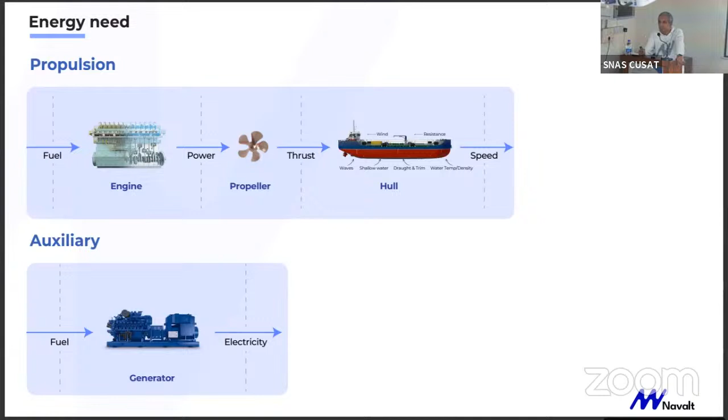Now, in any vessel, broadly, there are 5 energy sources. Of these 5 sources, the first 4 I will talk about as renewable ones. It could be a battery—the energy stored in the battery is grid energy, like KSEB energy, the electricity stored in a battery.

Solar is obviously the energy from the sun, and wind again, it could be wind to propulsion or wind to thrust, or wind could be wind to electricity as well—both can happen. Fuel cell is a broad term I have used; anything, any fuel that is used to convert to electricity is a fuel cell—it could be hydrogen, it could be anything else. And the traditional engine, where the fuel is burned. So these are the only 5 possibilities in a vessel.

So keeping that in mind—this is the whole landscape of decarbonization. When you say decarbonization or new technologies, you can think of efficiency in terms of output and input. Any vessel has a purpose—a function of a vessel is either to move people or cargo, or perform a function. That's a broad definition.

You can improve by increasing the output, like reducing port stays and so on—those are all operational improvements. You can also do a lot in terms of improving your design, like energy saving devices and various other things. That's the second broad group.

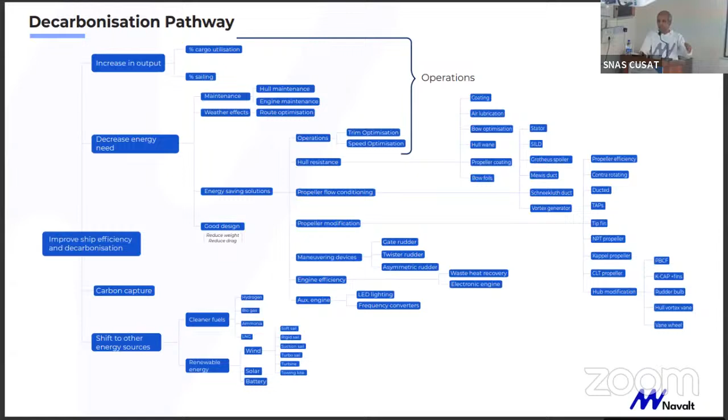And the other extreme, which is a large ship, it is also very clear that battery will not work. Solar can only contribute very little, which means wind has a play, maybe about 20%, and the rest has to be some clean fuel like hydrogen or something else. So these two are more or less clear.

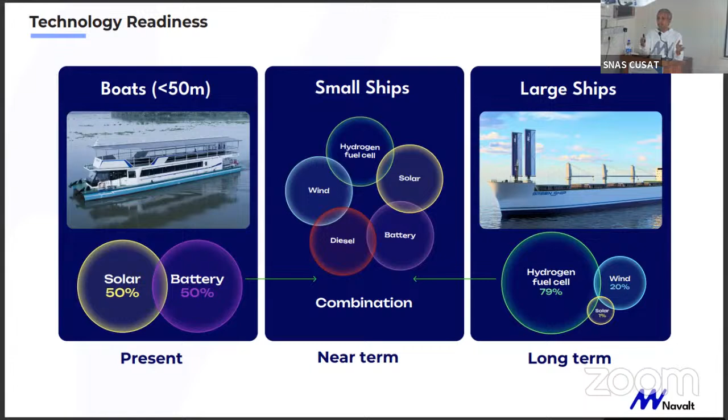And the in-between ones, which are coastal vessels, 50 to 100 meter vessels, inland vessels - here you need a combination of these, again defined by what is your energy need in a day and energy need between recharging. So that's the driver for combination.

Now, when you talk economics, first thing you have to understand is what is the cost of energy. Each energy source has a cost. So when I say cost, it's not merely the cost of the fuel, but what is the cost of energy you get. For example, on the top left is when you say battery as a source of energy.

So you have a grid cost as the input cost, you have a battery efficiency, then there is a system efficiency. So you can find what is the cost of electrical energy from a battery by using these terms. For example, if it's 7 rupees electricity cost, taking the 90% efficiency of battery and system efficiency of 90%, you get approximately 9 rupees as the cost of electrical energy from battery going into the motor. So that's the cost of energy - you get a feel of that number.

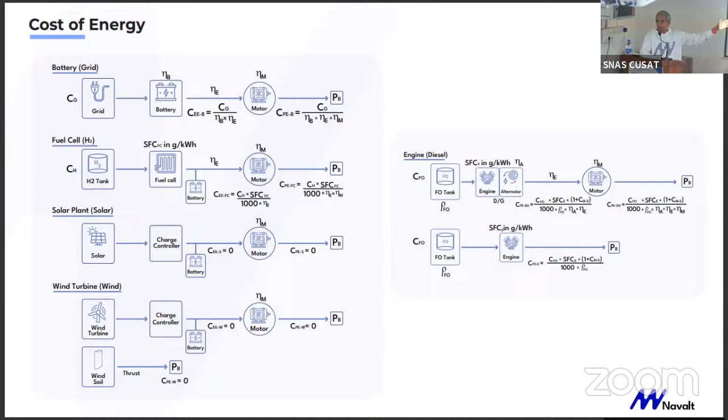Similarly, fuel cell has a cost based on fuel cell specific fuel consumption. Solar and wind, obviously, you assume the cost of energy is zero. And then the traditional diesel engine - you're already familiar with the specific fuel consumption, which ranges, for large engines, about 175 grams per kilowatt hour, to a small diesel engine in a boat, which could be 225 to 250 grams per kilowatt hour. That's the SFC conversion. With that, you can get the numbers - what is the cost of energy. This is usually the starting point when you're looking at economics.

This part is to cover which country electrification will work in, and why there is a difference in different countries. Just to give you a feel of that, I have put down the cost of grid electricity on the left side, and on the right part of the column, CFO, which is the cost of diesel. This is just to give a feel of the spread. These are ranked by the spread - the top spread is Hong Kong, where the cost of fuel is very high, electricity is very low, and so on and so forth.

So there are all these countries. India is somewhere in the top half. These are all in US cents, but just to give a feel - 125 US cents means 100 rupees, and 9 cents means about 7 rupees. So that's the number.

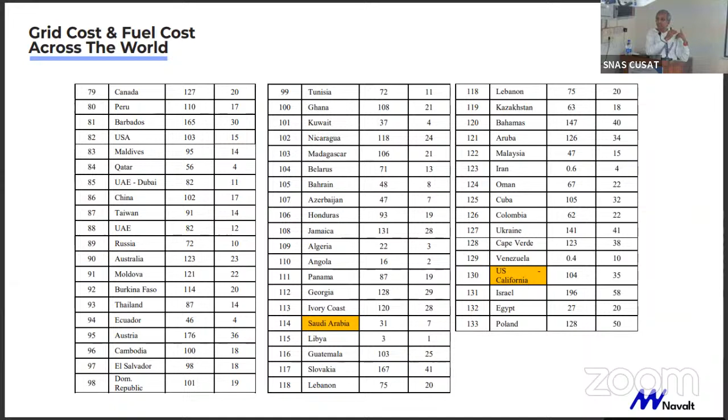And in the lower half are Saudi, California, etc., where the spread is low, and I will tell you what that significance is. So if you take those representative countries - Norway at the top, India in the top mid, and like these - the cost of fuel and cost of grid, if you analyze the cost of mechanical energy from that fuel diesel engine, which is what I represent as CEE - when I use the word, it is cost of electrical energy, and CP is cost of propulsion energy. This presentation will be shared, so you can always use that, but I'm just giving a sense of that number.

So, for example, in India, with 125 - this is 100 rupee diesel - the cost of electricity from a diesel engine, compared from battery for example, is 11, and engine is 50, which means roughly about 45 rupees is what electricity you get from a small diesel engine. This one is less. Okay, thank you.

So in India, about 50 cents or 45 rupees is the cost of electricity from using the grid versus a diesel engine, and this is from a grid, 10 rupees. This is a spread, India spread. So if you compute like this, what you feel...

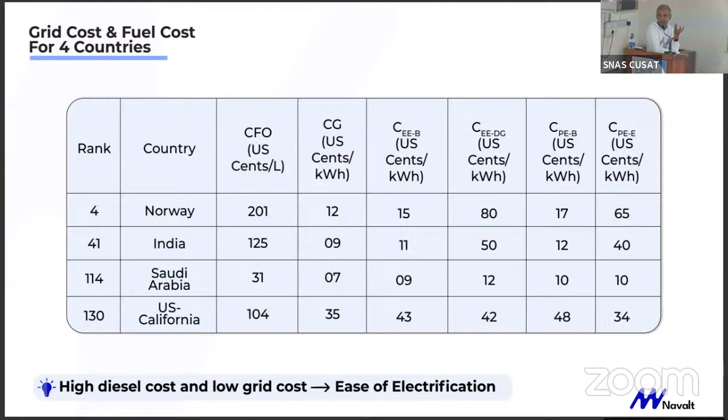Second insight you can get is when you take the numbers, for example, 80 cents electrical from DG and 15 electrical from battery. The spread is 65, 80 minus 15. So that spread is what is plotted here.

Norway has 65 auxiliary, 48 as propulsion. India is 39, 28. What this number shows you is almost always auxiliary has a bigger spread than propulsion. So when you do electrification, the first thing you should convert is the auxiliary load in a boat. Do auxiliary first, then go to propulsion, because auxiliary is always higher cost and thereby economics will work better.

Which is what we just discussed on a houseboat. So do auxiliary first, do propulsion. If possible, do both.

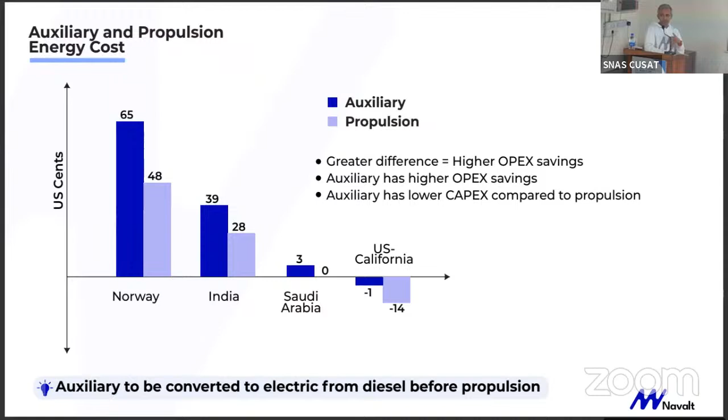Now, hydrogen is another important element to all this discussion. Today we have a hydrogen vessel in Varanasi, which Cochin Shipyard has built. Today, what is not known is what is the price of hydrogen. It's not very clear, there is no market as yet.

In Germany, there is this Toyota Mirai car. You can pump hydrogen at a station. It's about 10 euro per kilogram. It is expensive. But I have put the number 5, 3, 2, assuming that today 5 is possible.

3 may be in the near term, meaning a couple of years. 2 in the really long term. Why I say 2 is, although IOC, Reliance all have said they will do $1, theoretically it's very tough.

Because 1 kilogram of hydrogen to electrolyze, you need about 45 kilowatt hour of electrical energy. The cheapest electricity, if you get from solar, which is about 2 rupees, it means it's still 80, 85 or 90 rupees per kilogram just for the conversion. So that's $1.

Then you need another 85 rupees to compress and transfer. So $2 is the best you can achieve in 5-10 years.

So with this, when you put the same numbers, the same logic applies: auxiliary first and then propulsion. But the important thing is also, in the scenario when the fuel price goes down to 2, most countries can go hydrogen. In that scenario it goes to 2, not today.

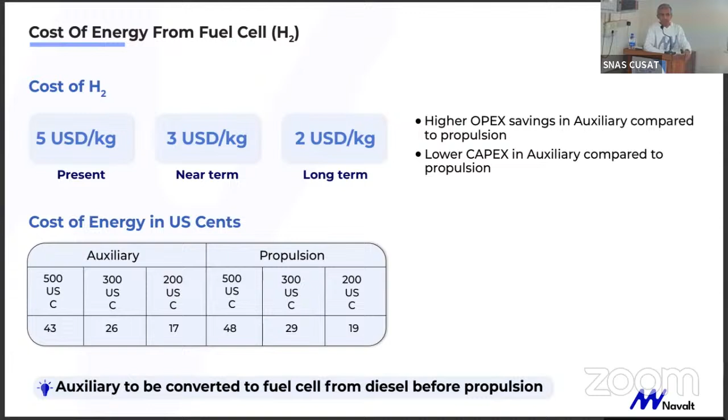Now OPEX is also so high because there's no fuel available now. It's not operating because the fuel is the tricky part. But the future is hydrogen, I'm just saying what it is today.

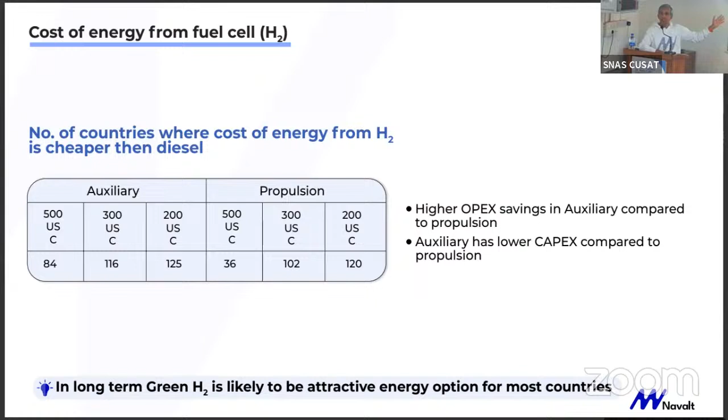So this is the number of countries where the hydrogen shift will happen. When it's low, most countries will shift. That is the expectation, and this is from an OPEX angle.

Now, in reality, there are many energy sources in a vessel. It's not just one, so you have a combination. You have a battery, you have a fuel cell, you have maybe a hybrid diesel engine, etc. So all those combinations are there. So how do you do it in that scenario?

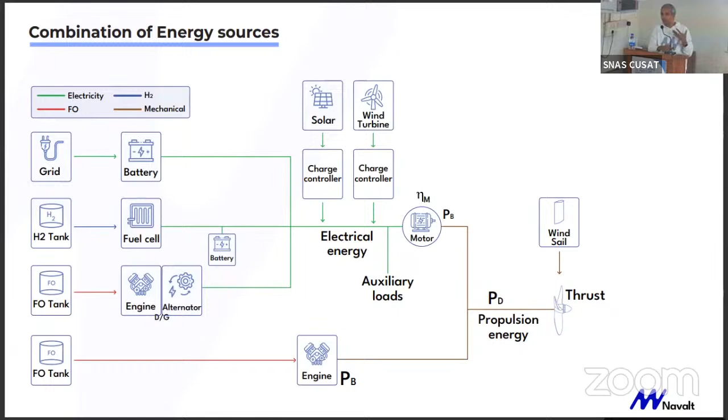Without going into too much analysis, the whole idea is you are going to know the cost of each of these energy sources and the proportion, the percentage contribution. It's like weighted average of anything, right? So if this is 8 rupees, this is 0, and this is say 20 rupees, you do percentages and you get the cost of energy. That's the logic.

It's a simple weighted average to find the cost of energy on the auxiliary side and then the propulsion side. Propulsion means some electricity generated goes to a motor to get propulsion, or a diesel engine directly. These are the only two ways, right? So this is the landscape again for how you will do the conversion and the costing.

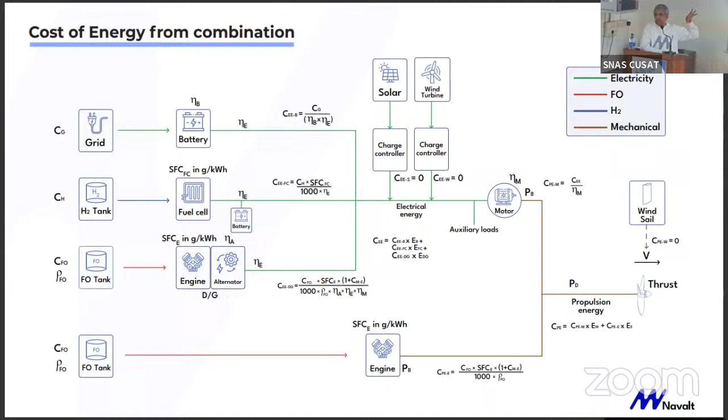Now, in the combination, I just want to give an example to give a feel of the numbers. Sir mentioned Aditya as an example, as a ferry. This is why I always argue for solar, especially in slow speed, and I'm very careful and conscious in using the word slow speed when the speeds are 6 knots, 8 knots. This is what I mean by slow speed.

Typical ferries, the contribution from sun can be high with the same structure, because once the boat is fixed, the area is fixed, your solar energy is fixed. So if your boat is going slow speed, like most inland ferries, like Aditya or any of the ferries operating, Aditya has 67% from sun. This is full year data, including monsoon, everything.

So in that scenario, what happens is, when you do the cost with 7 rupee electricity, you get about 9 odd rupees on grid cost, and the solar is 67%, meaning solar is free. So actually the cost of electricity is about 3 rupees for the energy, in the case of Aditya.

Whereas if you don't have solar and the same boat is pure electric, this would have been closer to 10 rupees, like 10, 12 cents. And if it's pure diesel, same Aditya, you put a diesel engine, it would have been 40 cents. This is the cost of energy on the propulsion side.

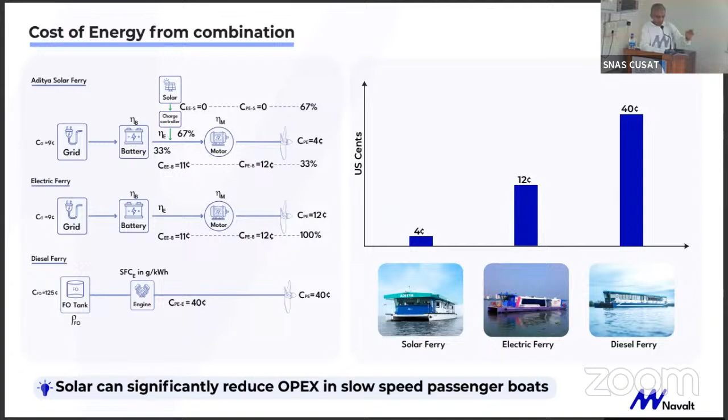Now, you can also have hybrid. When I say hybrid, it's like parallel or series. Series means the motor is the only thing that connects to the propeller. Parallel means the engine also connects. That's the only difference.

When we talk, I always give the advice that parallel is always cheaper than series, both CAPEX and OPEX. The reason in OPEX is because in series hybrid there is a double conversion, which is why series hybrid is more expensive from an OPEX angle. And series is always more expensive from CAPEX because the motors are big, so the prices go up.

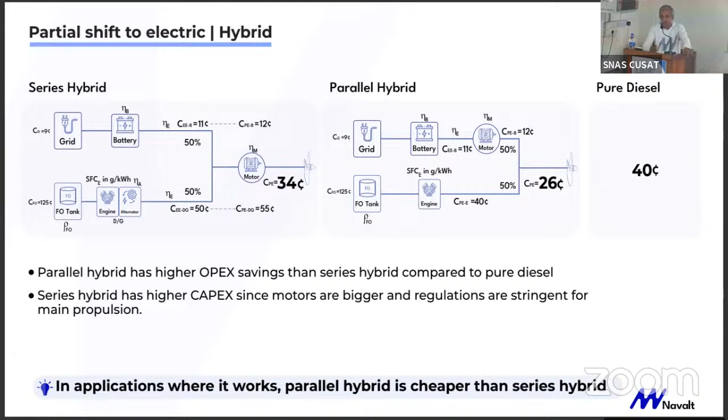So if you want hybrid and it works, parallel is the best. That's the only insight you can get from this when you do a partial shift.

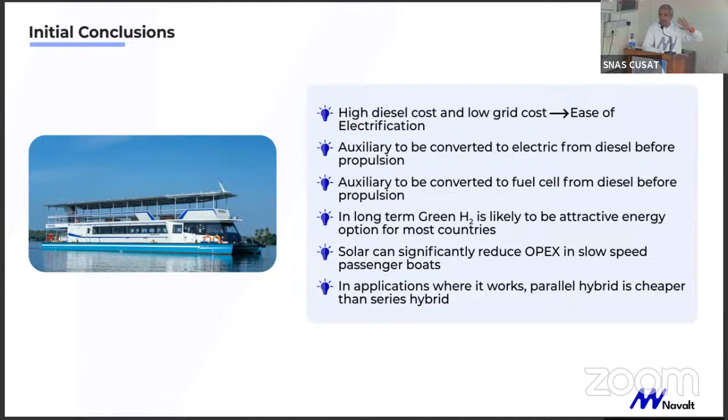So whatever I just told, I summarized as an initial conclusion using purely OPEX. All what I told, I'm not going to read again, but this is the insight you get, those 5 or 6 points you get. Now, obviously, when you say economics, it's not just OPEX that is important. You need to know CAPEX and the life cycle cost.

So this is how you should do economic analysis. Some of these numbers are based on the boats in operation. We have about 31 boats now in operation, solar boats, different sizes, small to big, and different applications like tourism. So using this data is what allows me to make this statement, which is why I wanted to set that context.

So we will take the case of a 100-passenger ferry, try the various speed combinations, 8 to 12, and range. Range, I mean how many kilometers you will run in a day. Aditya runs 66 kilometers. Most of the Kochi Metro boats run 60 to 70 kilometers. 100 is maximum. So 200 is applicable when the speeds are high, when you're at 10, 12 knots, that is when you do 200.

So if you put these same numbers, this is a foundation for the costing. And how you do costing is, again you're not going to read through this, but the logic is that you factor in all the costs, capital cost. So there will be all the input costs. These are all inputs to this analysis, which you'll be able to read when you get access to the PPT. But the idea is you get all the input cost, both CAPEX and OPEX. You have all the cost.

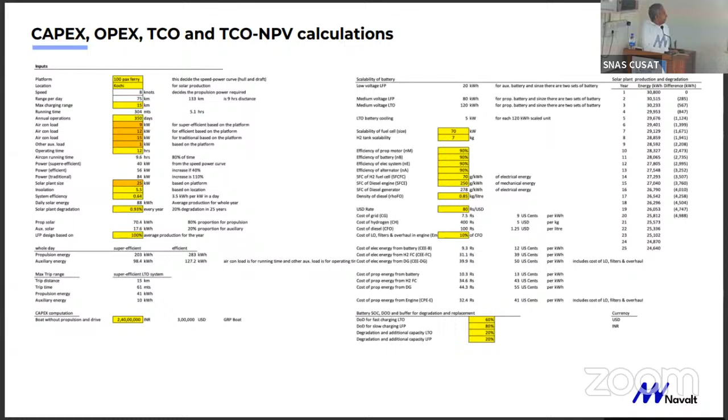And then each scenario is: I will do an LFP battery or an LTO battery, LFP plus solar, LTO plus solar. I have hydrogen, I have a pure diesel engine. So these are some, and I have fuel cell also.

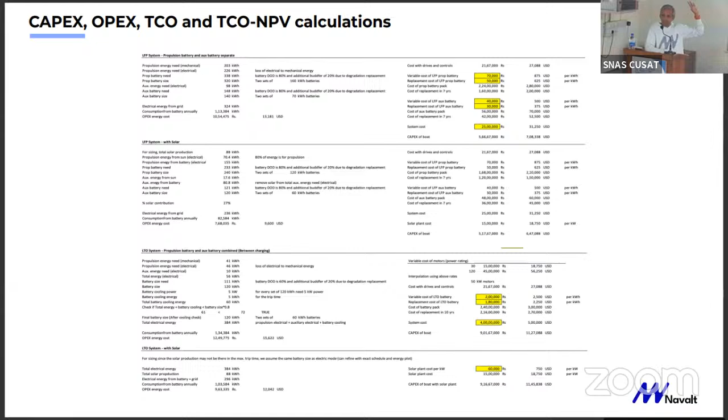These are all the possibilities. You find the CAPEX and OPEX the same way I just discussed. I will just give you the insight, which is what is important today.

Now, the way you do it, TCO means total cost of ownership. So you take first year, second year, third year, up to 20 years. In case of battery, you have battery replacement at the 7th year, 14th year. In case of LTO, it's a 10th year replacement. In the fuel cell, there is a replacement every few years, the fuel cell membrane, things like that. So you have to model all your costs, put it down.

So it's not only the cost you put, you have to introduce the time value of money. One important class you should carefully listen to when you are still studying is your economics class, which we all ignore. Even I ignored it when I was in engineering, but I'm telling you that's the most important class beyond your technical knowledge, because you need to model the real cost.

So the 100 rupees you get 1 year later is not the same as 100 rupees you get today. In India, inflation, government says it's 5%, but it's closer to 10% I would say. The fact is, it is higher inflation. So naturally, cost of money is important. That discount rate is what you need to model. And today, what we call net present value, you have to do for all projects.

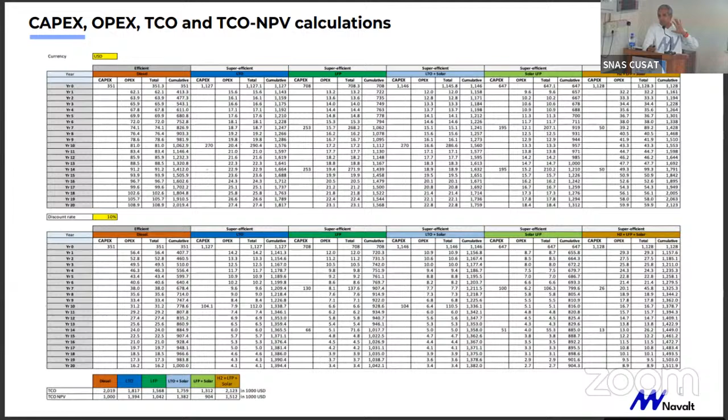So if you put that model, you have a total cost of ownership, convert to net present value. This is total cost of ownership with net present value. Then you will know which is the cheapest technology. This is the only way to know, not like some arbitrary statements. This is the way to do it.

So one thing we should all remember is in any green technology, the initial cost is higher. The savings are more. That is the logic. All green technology has high CAPEX, low OPEX.

So in that scenario, if the cost of money is high, which means your finance cost is high, that will always make it difficult for green technology, because you have a high initial cost and your future savings is less valuable when the cost of money is high.

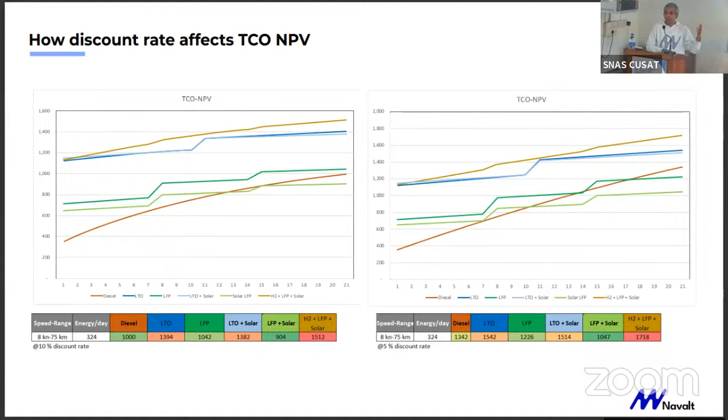Which means in countries like India, where the finance cost is high, if I go to a bank and borrow money for a project, it's mostly somewhere between 10 to 12%. It's on the high side. If I do the same thing in Europe, maybe 4-5%. If I do it in Japan, it may be 1-2%. So this number means in low discount or interest rate countries, it is easy to do green technology. That's the insight. So as the cost of money is higher, it is more difficult for green technology adoption.

So again, all this combination of speeds like 8 knots 75 kilometers, 12 knots 200 kilometers, all the combinations, the total cost of ownership number is what is plotted.

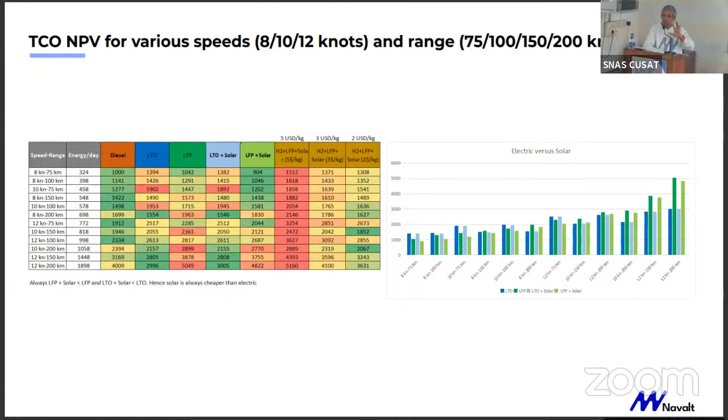So if you plot this, what you learn, or the insight I want you to take, is always LFP plus solar is cheaper than LFP. LTO plus solar is cheaper than LTO. And what you can learn is always putting solar is better than pure electric. That is an important insight you should learn from seeing this table.

Another important insight using the same results is, as you move from low speed, low range to high speed, high range, something is happening to this graph. There is a switch happening. Here, LTO is more expensive than LFP. Here, LTO is cheaper than LFP. So somewhere here, the switch is happening, somewhere around 10 knots 150 kilometers, or 12 knots 100 kilometers.

So this insight is what I was trying to convey, and I'm very vocal in the public domain about this. When I say that when public transport goes for LTO, you should have a scenario where the speeds are either high and the range is high. Otherwise, if you are investing in an expensive technology, it is not economical.

Which is why when the Kochi Metro boat runs at 50 to 60 kilometers per day and about 8 knots, it should have been better to do it at LFP with half the cost. But that's my only submission, analyzing this graph.

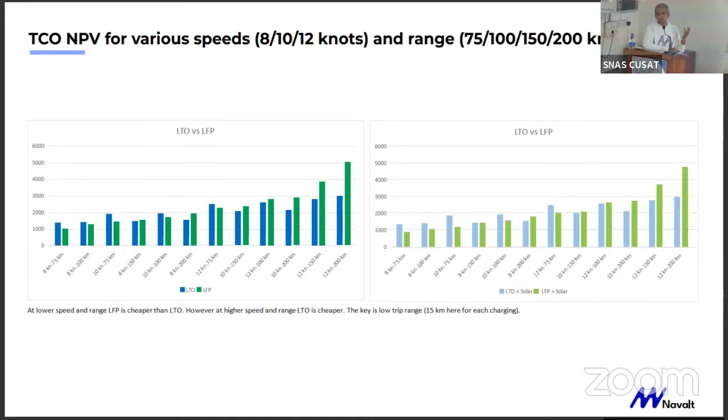And so the natural question is, when does hydrogen work? Only when the range is high, hydrogen works. At low speeds and range, it is again a bad idea to shift to hydrogen. When you do that 12 knots, 200 kilometers, hydrogen is cheaper, right? So when the range is high, hydrogen really works.

And I just want to say, when I say trip range, the special case is where the trip itself is very long, like from Ernakulam to Trivandrum, Ernakulam to Kozhikode. Such long range, when the speed is high, then the battery will not work because the battery size is super high. Then the better solution is go for hybrid, or where hydrogen works, go to hydrogen.

So the insight I would say is, at 12 knots and 200 kilometers, hydrogen starts becoming better than the battery because battery becomes super expensive. LFP goes over the roof because of the range. LTO works best when you have a short range, short trip range, you do frequent charge. That's really excellent technology there.

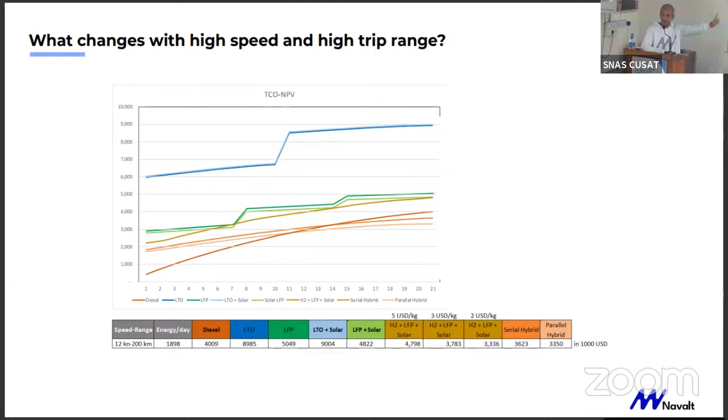And so this number I want to give is, when you go on a very large trip range, meaning 100 kilometers, even the hybrid, series hybrid and parallel hybrid, as you can see here, is even cheaper than hydrogen. So today, if you have to shift to electric, go for hybrid for the very long range, and then eventually switch to hydrogen is what my submission is.

So these are some of the insights I want to convey. If you have any questions, we still have some 10 minutes, I think. If you have any questions?

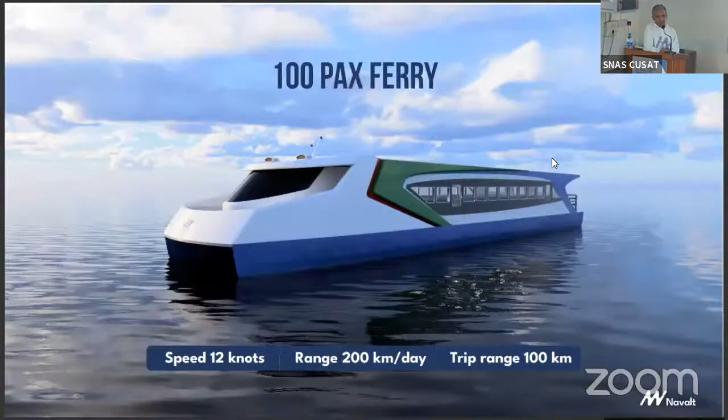The grid charging what you're doing is electricity made from coal, and you're charging it and running the boat. But then obviously, when you compare, if you do a proper analysis, you will see that if you do grid charging, where the grid is getting supplied from coal power plants, you're going to have a lot of problem with your SOx. Your NOx can be controlled, obviously, but your SOx values will shoot up like anything. So we are now professing hydrogen fuel cell systems, we just want to plug in the other one to have a balance. But rather than putting all our efforts into hydrogen, why can't we try to correct the root cause of the problem? Because you burn coal and produce electricity and grid charge it, you're going to create a lot of emissions. In fact, nobody is discussing that aspect. I don't know why.

So you have made 2 points, I would say. One is, unless the grid is clean, pure electric boats are not going to save anything on a very high level, except for small things like noise. But broadly, it is still as polluting if your grid is 100% from coal, right? The second point is, why go to hydrogen and why not cleaner grid as a thing? So let's discuss the first one.

Making the shift of the transport system to electric has to go in parallel with the shift of the grid from pure coal to cleaner sources. This has to happen simultaneously, not sequentially. Many technology adoptions take time until you achieve scale. Aditya is now 8 years running, we have some 20-30 boats coming every year, maybe next year 100, but we're still a very small percentage of the overall boat population.

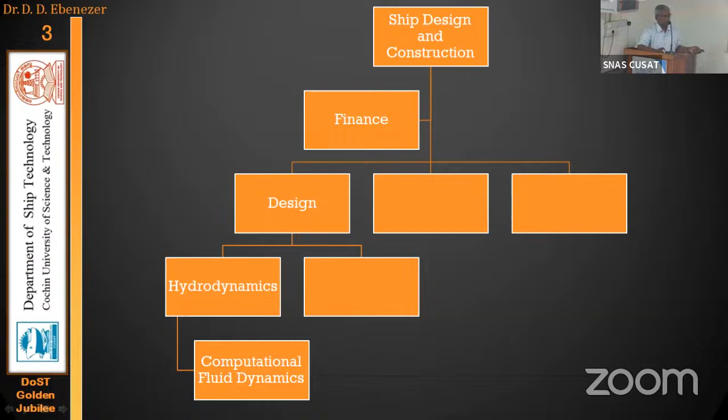What is computational ship hydrodynamics? As Sandit explained, what is a boat, a small ship, large ship. So what is computational ship hydrodynamics? For many people, it is only some very narrow part, but actually I'm using this term in a very broad sense. Primarily, we are going to talk about ships at an air-water interface. Later on, I'll mention submarines and why submarines are really much easier to deal with.

We are also talking about incompressible but viscous water. We are talking about ships - they're not going at very high speeds. The Mach number is low, so I don't have to worry about the compressibility of water, but I must account for the viscosity of water. Okay, so that's an important part.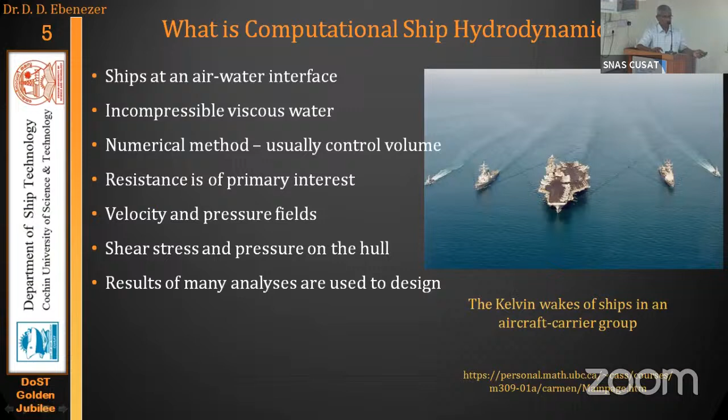What is another way to answer this question, what is computational ship hydrodynamics? One of many aids used by ship designers. So we ought to think of ourselves as quite important, but always remember that we are only one part of the big design process. You hear this word design a lot. All our final year projects are design of something, and people say, I designed something. So I ask generally, what is a design?

So this is something that I have coined, started using at NPOL the last 5 years of my stay there. It's a solution to a constrained optimization problem.

Design is a solution to a constrained optimization problem. Some couple of keywords there: of course, one is optimization. And I put a footnote there: it is not merely a solution that meets requirements. In the ship design process, we start with some owner's requirements, and offering a design that meets the owner's requirements, or offering something that meets the owner's requirements, I don't call it design.

It's a design only when it is optimized. Optimized in what sense? You decide. But when you say you have designed something, you should also be able to tell in what sense it is the best. It has to be the best in some sense. Only then does it qualify to be a design. So the design is a solution to a constrained optimization problem.

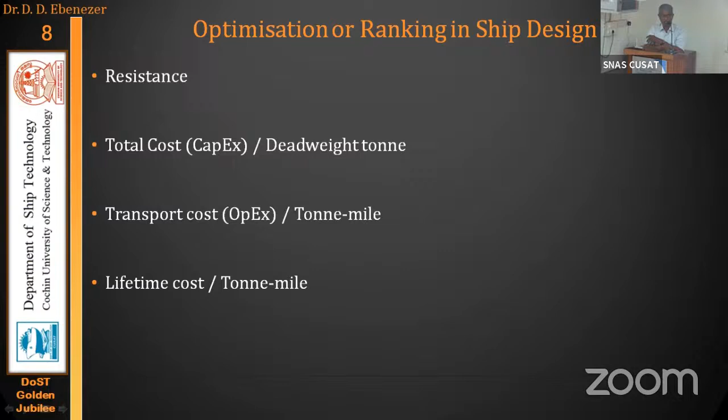I've shown this slide in a couple of my classes. Some of the BTech students have also seen this. This is to introduce you to system analysis. In our BTech classes, we have one class on resistance, another class on propulsion, and there's some amount of overlap where we try to tell you, towards the end of the semester, how to put these things together.

But even for a ship, I need to think of it as an engine, a propeller, a ship. I can optimize my ship, I can reduce the resistance of my ship, but that may seldom be the optimal solution for my entire system. My system is the whole thing. You may optimize the resistance and give me no space to fit a propeller, so that's not necessarily the best ship.

So again, that footnote is very important. It says assembling the best subsystems does not yield the best system. Very important. Every subsystem in your system could be the best from some criteria that you have evolved.

If you look at this whole system, input is fuel, output is speed. So output by input is what I want to optimize. Maybe I want a particular speed. But if you optimize your ship alone, optimize your propeller alone, come and fit them together, they won't work well.

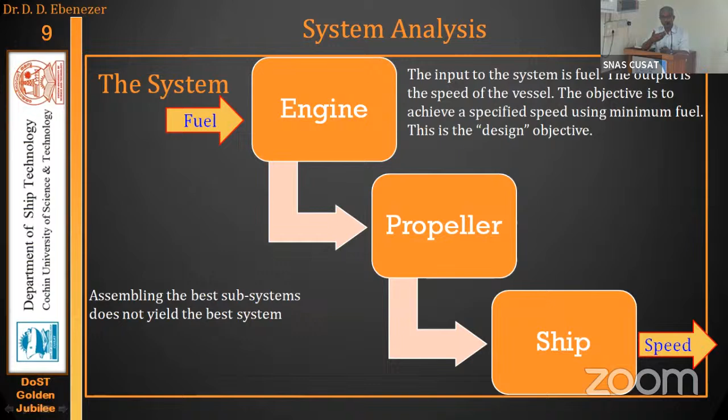So you need to consider the entire system, especially if one of them serves as a load and the other is driving it. Propeller serves as a load for the engine, the engine is driving the propeller, and the propeller is trying to provide thrust for the ship. So we need to think of this as a whole.

I want to give you some background that there's a lot of work going on in the last 40, 50 years on ship hydrodynamics, and workshops are being held periodically at the world level. India has not participated in these workshops in a big way, but there are numerous organizations regularly participating. It started in 1980, the last one was held in 2015, and the next one is going to be held in 2025.

In 2015, we did not have fantastic computing facilities, so most workshops were based on analyzing ship hydrodynamics well for models. Model sizes were 7 meters, sometimes 2 meters, but the emphasis was never on the full scale ship. Now we know that scaling up from model scale to full scale has its own problems. So the question is, can you model a full scale ship? Not a model, but a full scale. I know some of our MTech students are modeling full scale ships from a structural analysis viewpoint.

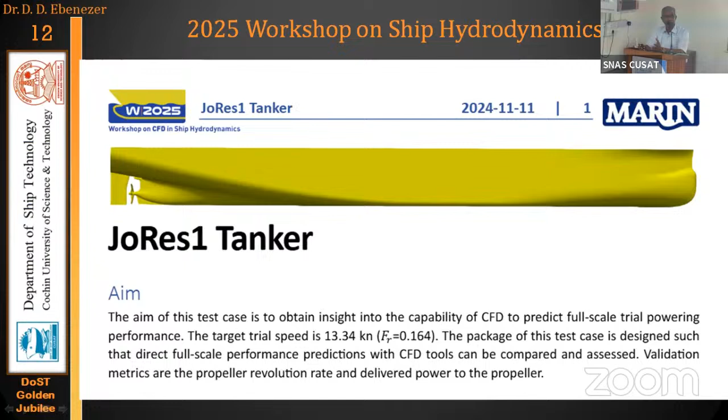In our department, we need to bring together these two things so that the department becomes a ship design agency, doing both hydrodynamics and structural analysis. In the early stages, we can build these separately - a structures group becoming expert, and a hydrodynamics group becoming expert. But after a few years, these two need to join so that we become a ship design agency.

If you're going to do computational ship hydrodynamics, you first need to know ship hydrodynamics well before starting computational work. Here's a big block diagram of what it involves. On the left side we've got inviscid flow, and below that on the right side we've got viscid flow where viscosity is included. Then I've got deeply submerged bodies, and ships at an air-water interface.

This is the interesting thing you studied in your BTech - D'Alembert's paradox: no forces act on a deeply submerged body moving at constant velocity in a straight line, zero resistance. That may come as a surprise to some, if you think that I don't need any power to move this body. The point is, viscosity is so important because that is what is exerting a force on my vehicle. That is why I have resistance.

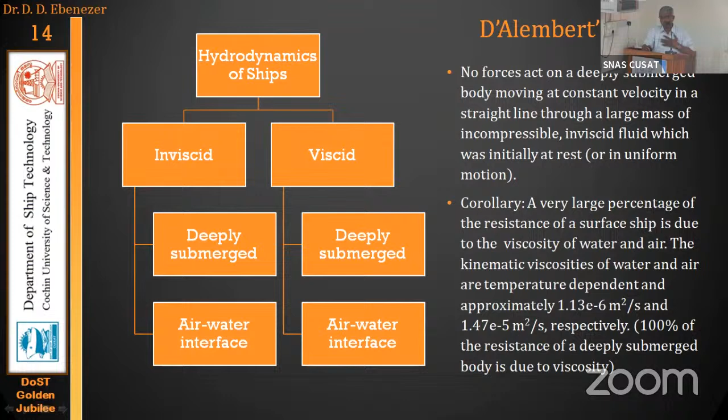But very interestingly, on the inviscid side, if you bring your vehicle to an air-water interface and still think there is no viscosity, now you've got resistance. So D'Alembert's paradox is only applicable to deeply submerged bodies. When I come to the air-water interface, even without viscosity, I'm going to face resistance. What's the implication of this? We'll see.

From there, we move to resistance of ships. Again, we need to understand this before we go into computational ship hydrodynamics. This word taxonomy is something I encountered after many years, after coming to CUSAT, because our syllabus says questions should be set at different levels of difficulty. Okay, fine, so we have taxonomy.

Taxonomy is a systematic way of breaking up something such that there is no overlap, so that they are disjoint sets. When we want to think about it like that, there are a couple of ways of doing it. I think about the total forces acting on my ship - the forces could be normal forces, which we call pressure forces, or they could be tangential forces. The distinction is very clear: either it's normal or tangential.

These are the only two forces which act on my ship, there is nothing else. Even at an air-water interface, all the forces acting on my ship can be broken up like this. So if I want to find the total resistance of a ship, I can always compute the pressure forces separately and the friction forces separately, and I can add them to get the total resistance.

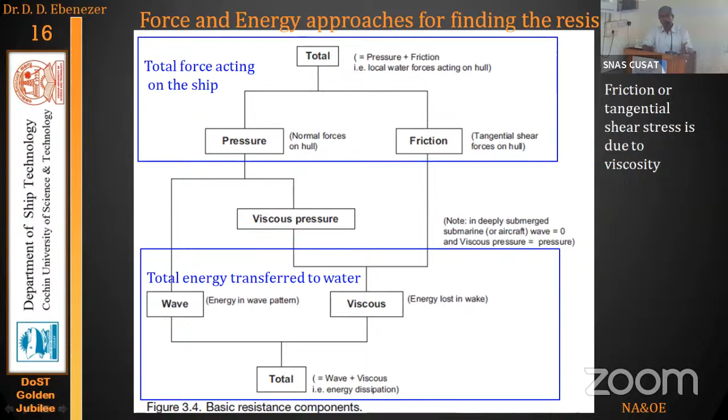But sometimes you want to put your foot into both. You want to know what the pressure is, what the tangential stress is, but you also want to know the surface displacement.

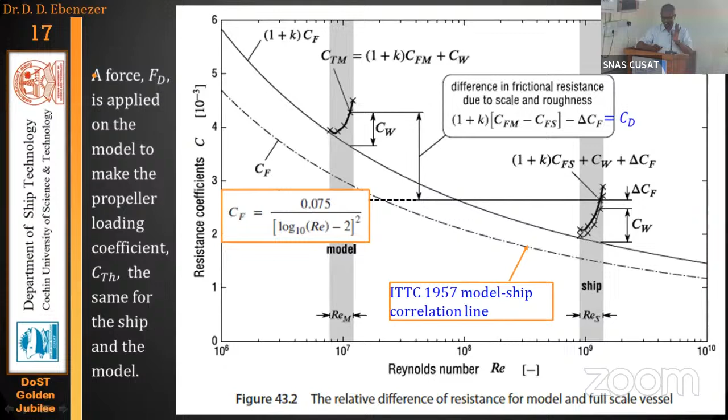Okay, so this is a very important thing. There is a lot of information available in the world. Whether you understand it, whether you digest it, whether you can use it, that is the key point. Internet has got everything. How do you know how to use it? That's the key point.

So this is from an excellent book by Larsson and Raven. They have shown the breakup of resistance of a few types of ships. I know you can't read the small text, but okay. So this is for a tanker. And the next one is for a container ship. And the next one is for a fishing vessel.

So what I want you to look at is this line, showing what percentage of the total resistance is due merely to the ITTC line. For a tanker, 65% of the total resistance is from the ITTC line, don't have to do much. If you come to a fishing vessel, only 25% is from the ITTC. So actually, it is much harder to design a good fishing vessel than it is to design a good tanker.

So where does much of the resistance for a fishing vessel come from? 57.5% is coming from wave resistance for a fishing vessel. And there are people in our country and elsewhere who are very good at optimizing the wave resistance. So you give them a ship, you give them a hull, they will change a few things here and there, and they will reduce the total resistance. If you want, you can do an experiment and see, or do a CFD and see. But the point I'm making is that fishing vessels, there is a lot of space there for you to optimize.

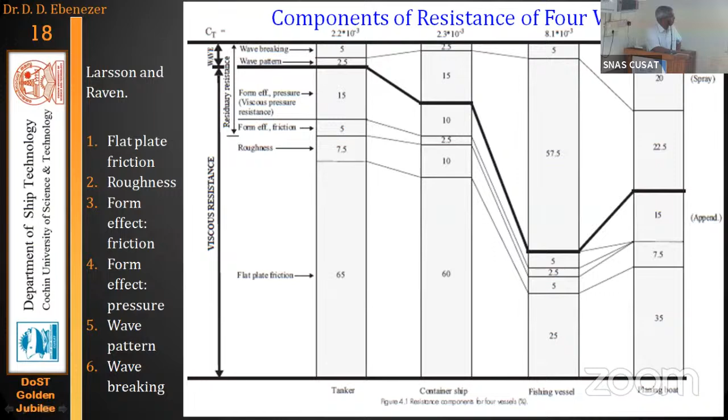Now the resistance is the easiest thing to compute, and why? Because it's an integral over the surface. And as everybody knows, your integrands can be terribly off, but your integrals will be right. So resistance we can often get with low percentage errors, and we can estimate resistance quite accurately.

But a difference of 2% in resistance is 2% in fuel cost, and your whole equation for the economics may change. And your decision, more than that, when you are comparing two different hulls and you want to decide which one to choose, if you don't do it accurately, you will choose the wrong one and you will end up with 2% more resistance and therefore the cost.

Okay, and yeah, but even resistance is not so simple to estimate. Every ship has got regions with adverse pressure gradient in the stern sector. And people in the industry are always using this K epsilon turbulence model because it is cheaper to run in terms of computation time, and that is not capable of modeling the flow in the stern sector. So definitely your errors with the K epsilon model are going to be high, and you should use a better model. So we never use the K epsilon in our CHASE lab, we've always been working with K omega, which is much better.

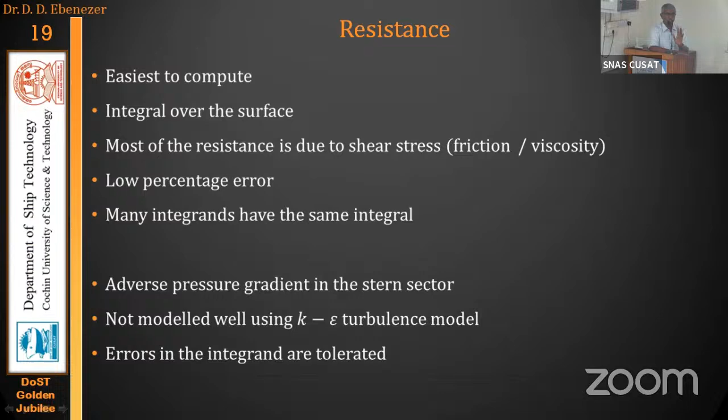That combination is not easily available. Okay, what are the other functions and fields of interest?

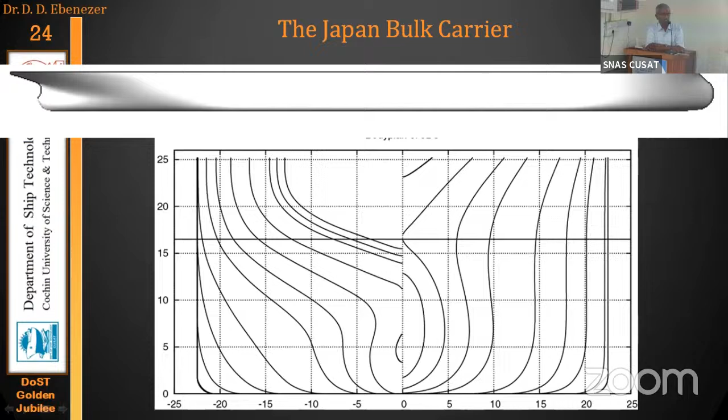This is a Japan bulk carrier lines, you can just take a look at that. This is a KRISO container ship.

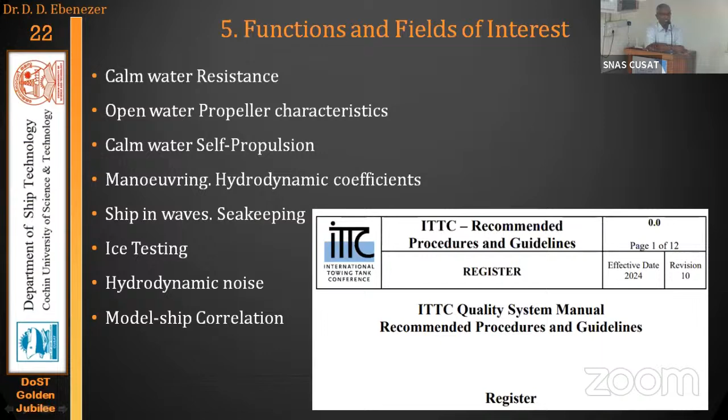I've been telling in the stability classes that most of the accidents which happen at sea are container ships, right? So this caught my attention. Look at this Japan bulk carrier, it's got a GM of 5.3 meters, its length is 280 meters. This container ship's length is 230 meters, and it has a GM of 0.6. It's kind of hidden there, but the value for the container ship GM is only 0.6, whereas it is 5.3 for the bulk carrier.

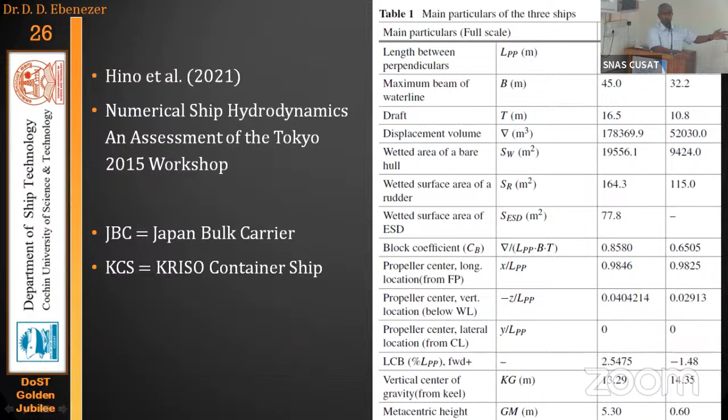So different people have come together and presented these results. We are learning from them, and we are also making our original contributions to this.

Shruti has been working on the JBC, and this is the mesh that we use. You can see that it follows the Kelvin wake pattern, so that we don't mesh unnecessarily in places that do not have high gradients. Only regions with high gradients are meshed finely.

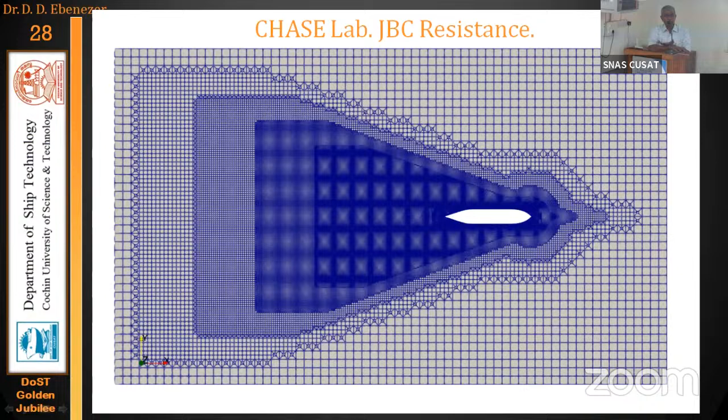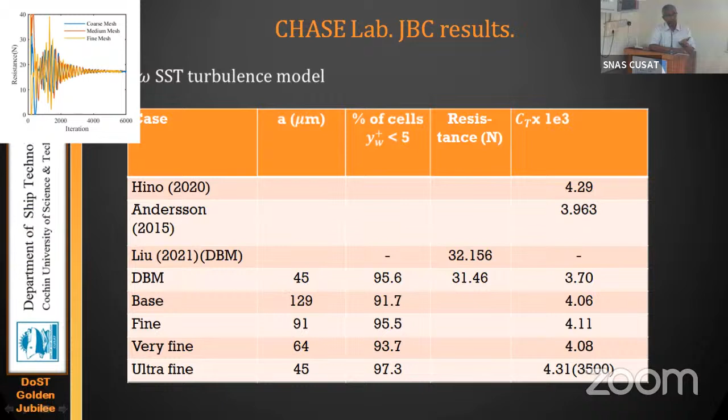And with that we get very good values of resistance. Here you can see our base mesh gave us some value of coefficient of resistance, and our ultra-fine mesh gives this value, which is very close to the experimental value. I can't go into all the details, just telling you that we've developed a very nice systematic way of meshing the ship so that we get very accurate results. Here's the surface elevation for that ship.

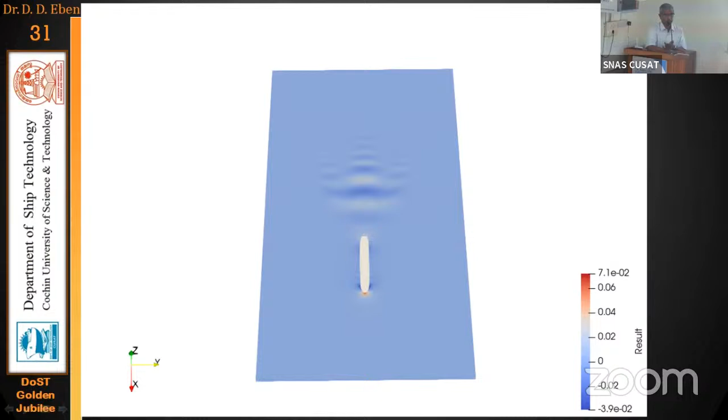Okay, so this is a Kriso container ship. We have OpenFOAM in our lab, and we have computers with 128 GB of RAM. We've also got StarCCM running on computers with 16 GB of RAM. If you're smart, you will know how to use whatever resources you have in a good way. You cannot always keep saying, I wish I had a crore more money or more computing power, then I will work wonders. No, you need to work wonders with whatever you've got. After that, you can go to the next level.

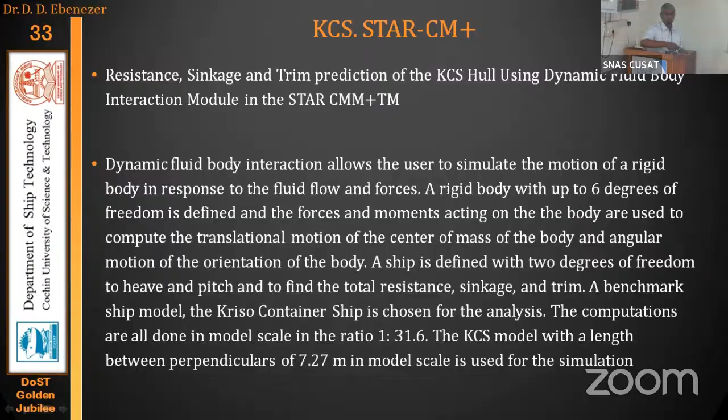So here are some results obtained using StarCCM and our 16 GB RAM resources. There's a tutorial in Star that some of you will know, so we followed this tutorial. In this case, we allow the ship to heave as well as pitch. The ship is not fixed; it's moving forward, but it's also allowed to heave and pitch. So this problem is a little harder to solve, but it's done with less than about 2 million cells for a fine mesh.

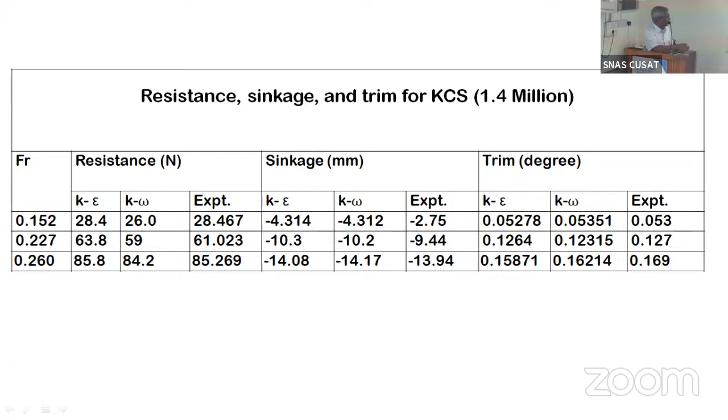We can measure sinkage and trim. We are comparing our values with those found in the experiment. I mentioned that k-epsilon is what industry is always using, but k-omega is better. These are things that are difficult to measure, but we are doing it with k-omega. It's almost at the end.

This is a surface elevation for the JBC, Japan Bulk Carrier. People have done experiments and found out the surface elevation on the hull, on the center line of the hull, so you don't have many measurement points there. If you move away from the ship a little bit, you can measure these points very nicely, and they have a large number of points. We've compared our results with these points as well, and it's in good agreement.

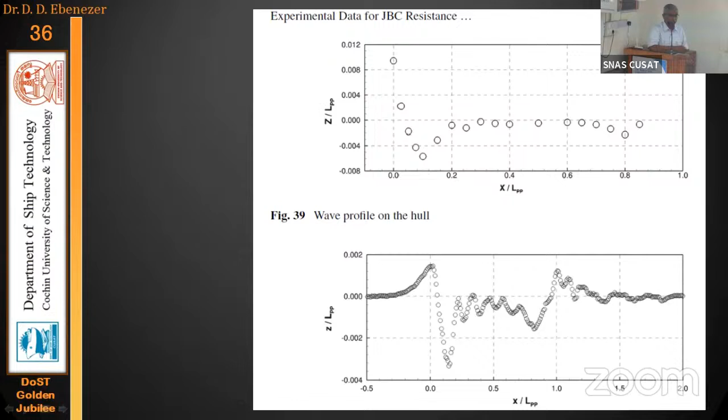Okay, I want to conclude where I started. At this stage of your life, as a student, you need to get expertise in whatever you're doing, but you need to be aware that you're part of a big organization, that you have to fit into the whole thing. Don't think of yourself as a structural analyst or a computational fluid dynamicist, think of yourself as somebody who's doing ship design and construction.

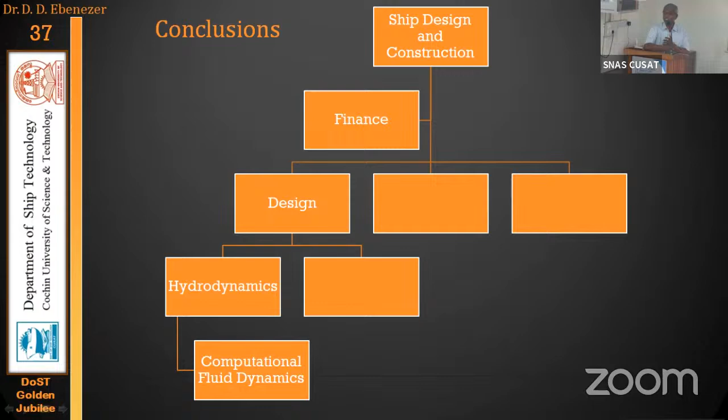More definite conclusions: our level of expertise in computational fluid dynamics and ship hydrodynamics has increased greatly at CHASE in recent years. All credit goes to our students because they have executed all the ideas. They have tried many different things, and they have helped us understand how to do things well and how to do things right.

Mesh generation is both an art and a science. Excellent meshes that meet tight specifications are generated by our students in both OpenFOAM and StarCCM. In all these cases, you just have to tell them, hey, this is important, do it, and they find a way to do it. So you just need to recognize what is important. Convergence of results depends a lot on mesh quality. If you have a good mesh, good convergence will be obtained every run.

We've done commercial jobs using OpenFOAM at very competitive rates. A private company comes to us and says, you do CFD for me, and we've done it. Our rates are low and we've done it in a short time, so they come back to us again.

A new 40 lakh CFD project has been approved by the CMD of CSL. We are expecting that order to be given to us soon, and the project will start soon. We are planning to buy ShipFlow. ShipFlow is in use at IIT Kharagpur, for example. It's a good but very costly computational fluid dynamics package. We are getting an educational institution discount for it, and that will help.

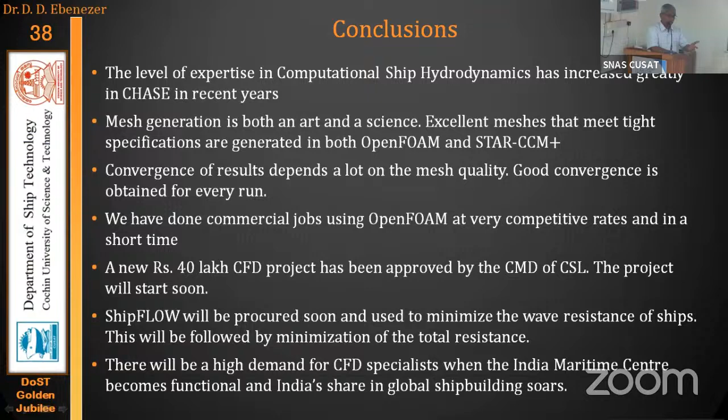So there will be high demand for CFD specialists when the India Maritime Center becomes functional. This is something that is already on the cards. India is planning to design and build more ships, so there will be higher demand for our graduates. I hope to see you all very soon in very high positions. Thank you very much.

Thank you, sir, for your excellent motivational speech for our students, for both BTech and MTech students. And as you really pointed out regarding the design and structural and hydrodynamics aspects, so what way can you advise or give suggestions for students' projects here?

Students' projects here, so that they can improve their quality of projects, because they have been doing this project for the last 50 years—same design. Only the name of the ships are varying, but what is the innovation? Is it there in the project? Can you suggest something?

This question is about BTech projects and how they can be made better. When we want to publish something, we have to do a literature review. So I asked our BTech students, whom I have taught and who are now in the final year—you're going to design a tanker, do you have the project reports of some seniors who have also done tankers? So the first thing we tell them in our first review meeting is: what did your five seniors do? They are supposed to first digest what their seniors have done before they embark on their own work. We have to build on what we already have.

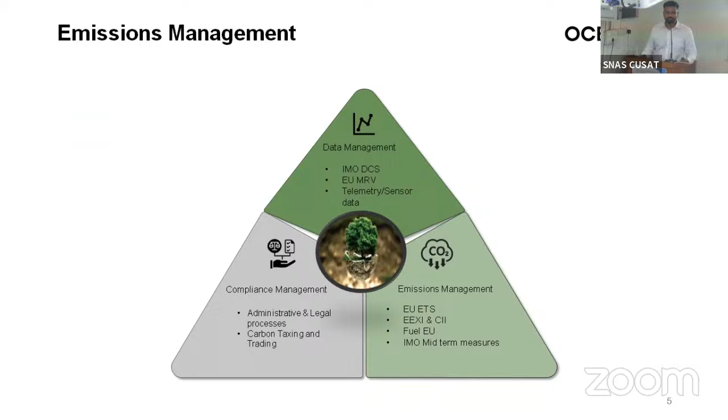It's a sad fact that although shipping emits only 3% of world emissions, because we are a very regulated industry, people push us to do the best. As a seafarer, I had the same problem - people ashore were making everything look good in theory, but to put it in practice, we had a lot of difficulty.

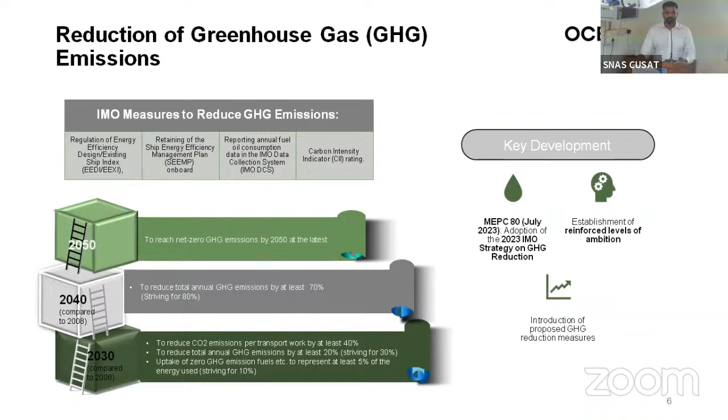So reduction of GHG is basically what we look at - there are 3 important greenhouse gases around us. I've put in detail how, from now till 2050, we are looking at decarbonization. I think these rules and regulations you are already aware of. I'll share the PPT, but I think that's more something which won't stay in memory. We just need to know that there are some targets and timelines that are set.

For them, it's very simple - they want to decarbonize this continent by 2050. And it's not just restricted to the marine sector. They have made a plan called Fit for 55, in which they have many other sub-projects that they are working on.

They are also making an innovation fund in which whatever tax is collected via the taxation system - the EU ETS system, which I'll cover - they'll pool money there. We know that most of it is politically driven, and there's a lot of economics in the process. But I also believe that when you have more funds coming in, you have more technologies that will really mature, and with economies of scale, the price might go down - that's a positive way of looking at it.

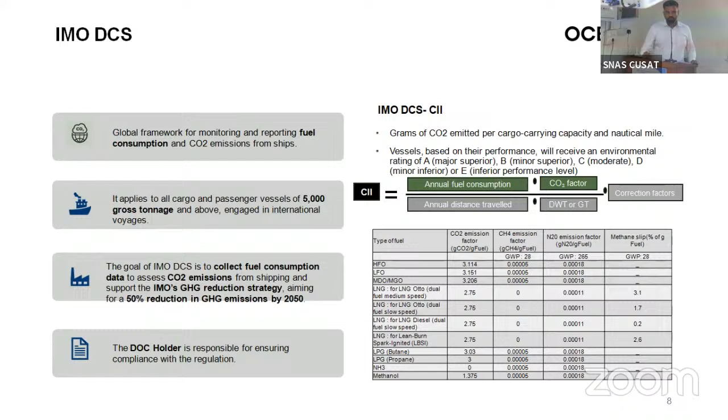But with other regulations happening, CII is still discussed. It's not penalizing though - there's no financial implication. That's where, going into EU ETS and Fuel EU, more people are focusing on those rather than CII. But in future, IMO will come up with a universal carbon levy or some kind of global fuel index, which will most probably run between $400 to $600 per unit of that index.

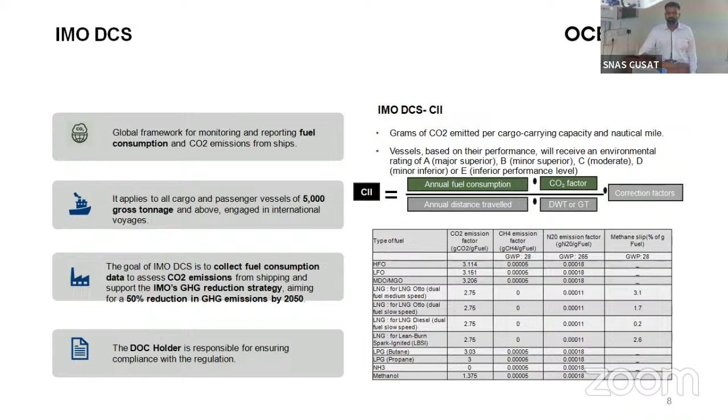So now I'm covering EU ETS. EU ETS means the emission trading system of the EU. It's based on a cap and trade system - economics again, where if you come, you have to pay tax for whatever you are emitting. The person who's paying for the fuel is the one responsible for paying that tax, and that tax goes to the administrative authorities, or those member states who are part of that continent.

This also means it has got a price in the market, so that's why we call it a cap and trade system - it's like share trading, and based on that the price of it moves. So it's a win-win situation as per them. You pay tax, but you also get a benefit: if you bring more technologies that reduce your fuel consumption, your CO2 reduces, so you can actually negate that price from somebody who's really polluting the environment because he needs to pay for that.

So that's also another project we have - we are doing this EU ETS full service for our clients who are mostly based in Europe or have vessels which are calling Europe.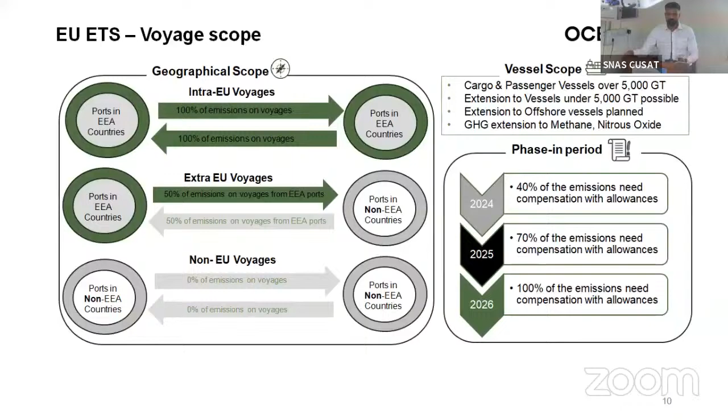Now I'll come to Fuel EU, another complex regulation. We are also trying to understand from our side what this really means, but this is also defined with the same rule which is there for the geographical scope - the intra, extra, non-EU benchmarking is still there. But this is more into penalties on the GHG intensity of the fuel that you are using.

So they have already made a capping of conventional fuels - it's already above the cap, so obviously you need to pay. Why have they kept it like that? Because they want to basically make people let go of conventional fuels and move into alternative fuels, because the penalty is high.

And when you look at the European Union, we have to understand the cost is an accumulation of both EU ETS and Fuel EU. It's not that you are just paying only for Fuel EU - you will have to also pay for the EU ETS cost.

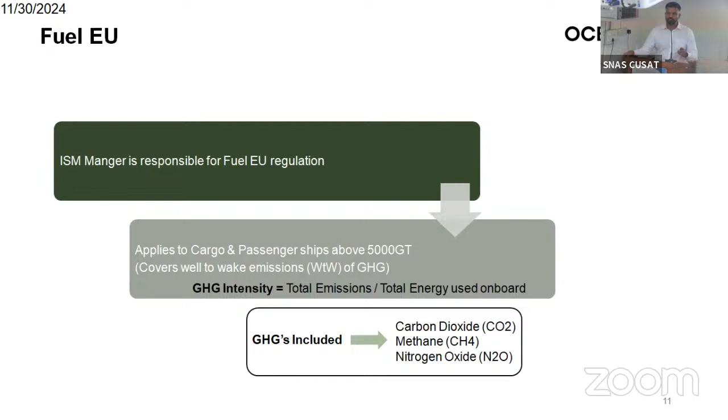So from 91.16, we are reducing it down to almost 18.23 by 2050. That's the amount of reduction which is needed in these years to reach that 2050, carbon neutral system.

But for certain vessels with a deficit, the pooling is the best option if you have good exposure in the EU. But for certain vessels it might just be paying off the penalty. So a combination of EU ETS and fuel EU cost is something shipping companies are already considering.

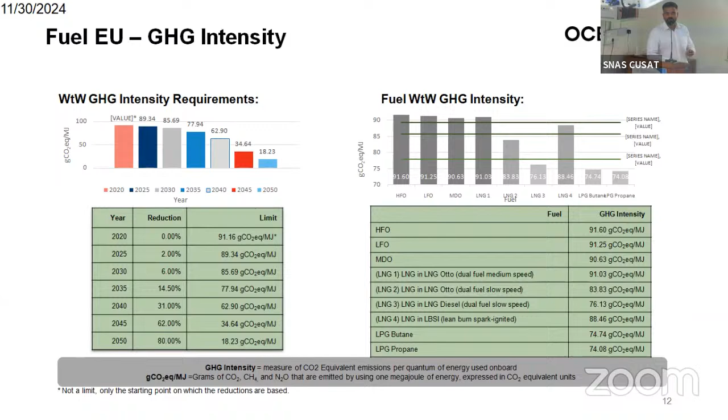And the cost is going to increase because, as I was showing, that's the beauty of how they've done it—every year they are going to reduce that capping. So your penalty is really going to increase every 5 years unless you do something about it. And operational efficiency, or technical efficiency, is not going to do much.

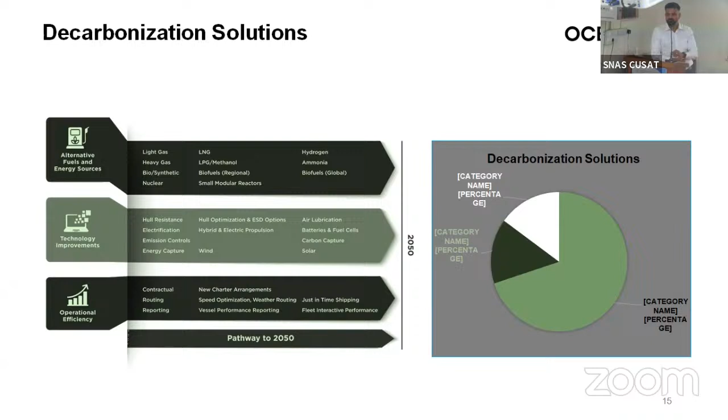Now we'll come to what we do actually for our clients. So this is basically vessel performance, hull performance, and machinery performance. We set up these KPIs to ensure that operational efficiency is done on board the vessel. And actually, believe me, majority of the vessels are still not doing proper energy efficiency measures on board.

We still have leaking systems. We still have bunker, or let's say fuel data, not being reported properly. And this data comes from competent chief engineers and masters. It's because they have not been guided properly, because most of the merchant ship fleets work on simple principles.

You have to make the ship safe. You have to pass the vetting inspections. You have to pass all this. And this thought has never gone to them that data is also important.

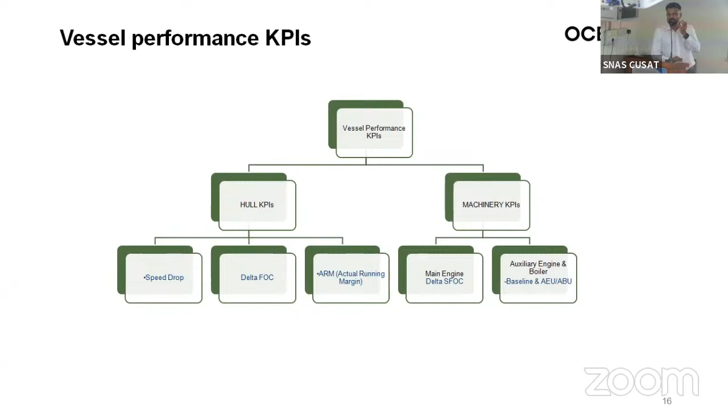I mentioned this in the DIM seminar also, that frequently we have these conversations with chief engineers and we tell them that whatever you do on board is of no use if you come at noon and write a bad report on fuel consumption and power reporting, because that sets the whole thing, it does not work in that favor. So I'm just covering some of the tools that we have, but what are we actually looking at?

We are looking at voyage optimization, hull and propeller performance, voyage execution, charter party monitoring, engine performance, all this. So all these small but relevant optimization methods are what we do.

We think that, added up, all this brings that change, but not in terms of Fuel EU, as I was saying, it's just 15%. But the point is, we have a large chunk of fleet which is not energy efficient, which is not looking at what a company on a broader horizon should be looking at for sustainability.

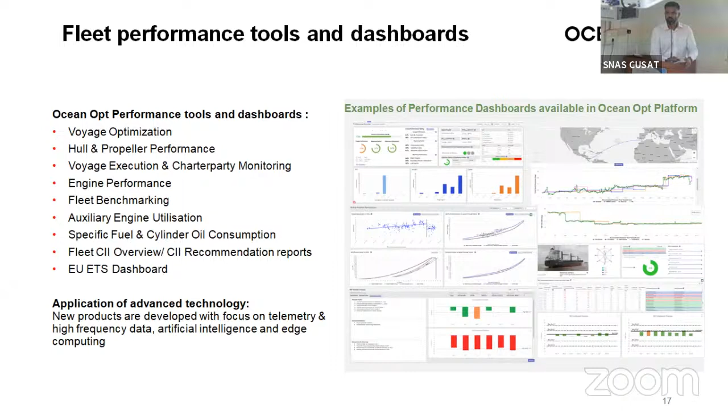So I'm just coming to, energy efficiency actually on board the vessel is not being done properly. There are vessels which do, but finally it comes to the people on board. And that's why we stress a lot on the seafarers.

A vessel which was to do a hull cleaning or an engine performance monitoring, we actually preponed it because our analytics was telling that it's not going the right way. And that's how we actually say that we have saved fuel. So you can't reduce fuel, you can only optimize fuel. So what it is supposed to, let's say, consume, it has to consume. But because of the intervention is what we have just mentioned.

And that's mostly on the hull, as you know. And the main engine also, we see big issues, because in terms of reporting, a classic example is specific fuel oil consumption, which is basically your fuel consumption over power. But there are a lot of manual entries where the chief engineer, or let's say the vessel crew, just report - this is the consumption, this is the power, this is it.

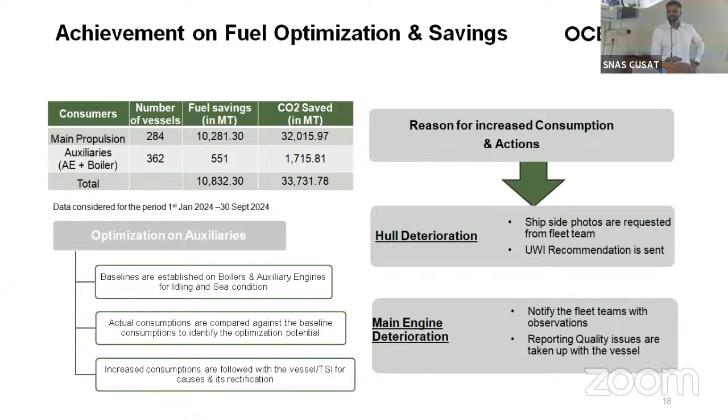Nobody cross checks. Nobody really goes into what is actually happening on the engine. I have done that as a chief engineer, so I really know what is the difference that we have to make on board. And I think this was something which was covered already in the previous session. So finally, it's to economics and how you really understand the cost. If you look at the primary costs now, and as I was saying, at this present condition, you have so much of regulatory costs.

The fuel costs are comparatively less, and you also have to look at the shipbuilding cost. But over the years, if you move to alternative fuels, your fuel costs will increase, but your regulatory costs will come down. The point here is you have to make a fine balance of these three important regulations.

So my point is this: you have to evaluate vessel by vessel. Every vessel is different, because all this depends on the operation of the vessel. Where is your vessel operating? What kind of vessel is it? What kind of regulations are the vessels exposed to? And the operational profile, how much is in the European Union, how much outside the EU - everything counts.

Another important factor is if these IMO midterm measures really happen, that's an additional taxing for the global option. So that means if you are planning to sell off a vessel, or at least retain a vessel for the next 10 years, you have to think about all these costs coming in. And then your business, revenue and profits also need to be calculated in that way.

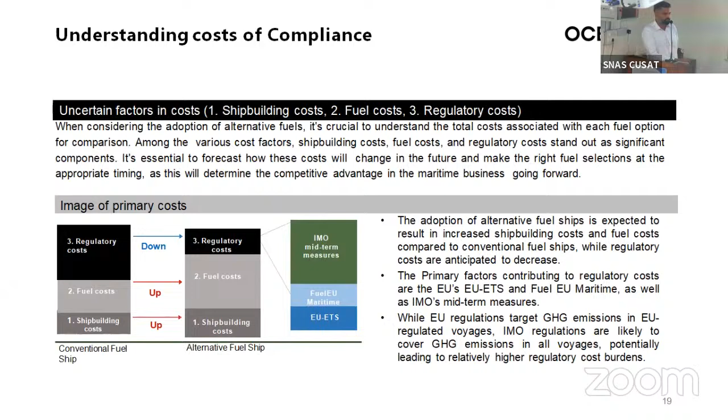I'm just looking back at seafarer understanding this. So if you see one vessel out at sea, it reports to our platform, which is mostly used by ship managers and owners, and it's also reporting to the charter. So on a daily basis, a ship reports to the owner platform and the charter platform.

Now charters, having to pay for the fuel, have also established proper performance teams in that department, because I am paying those taxes for the European Union - as a charter, I am the one who has to pay for each and every ton of CO2. So he has become more careful now.

And so he is questioning the owner, who was earlier having all the data coming in. What happened was that earlier this data was only in the ship manager system, and there's the speed and consumption, as you know, that we are working on. So some of the commercial teams under the ship owners were doing this - they would say, don't show too much consumption, because we know it's over-consuming, but reduce it, because it's based on an owner versus charter ship consumption metric that we have to operate. Otherwise, we'll get a claim.

But what happens is that you are reducing that consumption, but actually what's happening on board and what you're reporting is different. And so this is what the IMO is now telling - that owners and charters need to collaborate. My point is this: it comes down to the seafarer understanding that his reporting has a big commercial implication, because the charter is going to ask for that fuel that he's looking at.

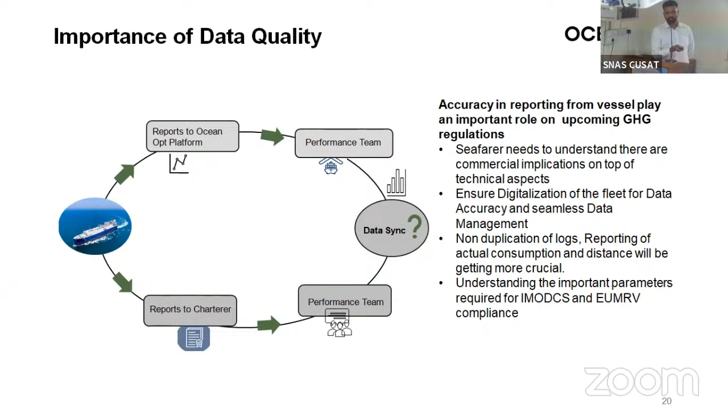And this is the entire loop of the services that we do, starting from data collection to the verification, calculating how much CO2 is required, and then the allowances which need to come in - the receival, the accounting, verification, submission. So we do this end to end for EU ETS and FuelEU. So the point here is that there is a lot of opportunity.

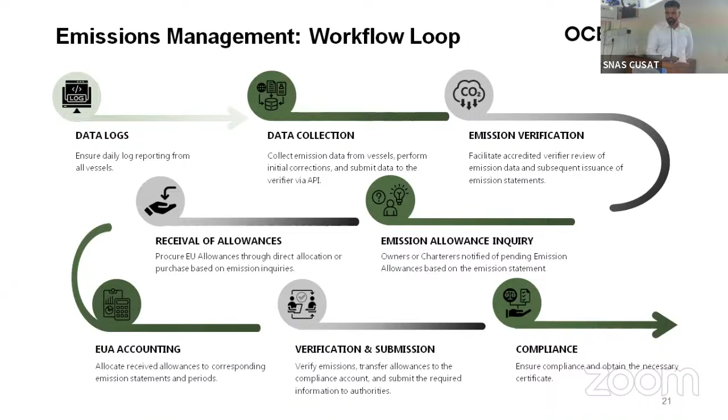We have almost 31 people in our team, and they have a lot of exposure to all this and to the new regulations. And we feel this is a big opportunity going ahead for the next 5-10 years, because this comes with a lot of commercial angle as well.

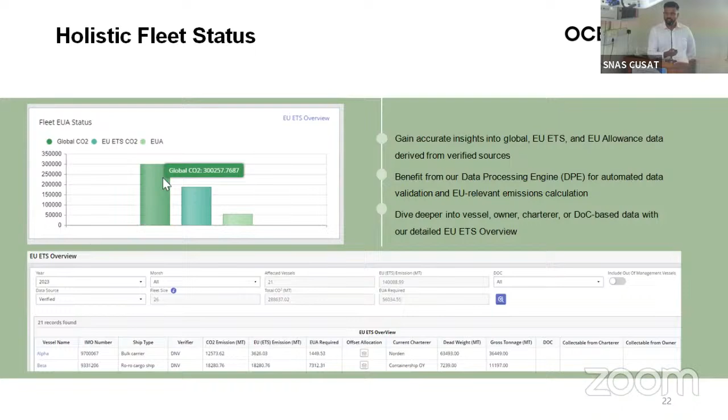Earlier it was just looking at technically getting the vessels efficient and performance, but please understand that people are looking at it on a very commercial business angle now, and so the services also will be much more important. We have a lot of software companies with performance, but I think at the end of the day, a client requires a person who does it end to end.

That's the reason we started this, basically looking at all these services for shipping companies. So this is a list of services that we have.

Thank you so much for your patient hearing. I'm not sure whether I've touched upon everything familiar to you, or maybe it's too complex, but I'm open to any questions.